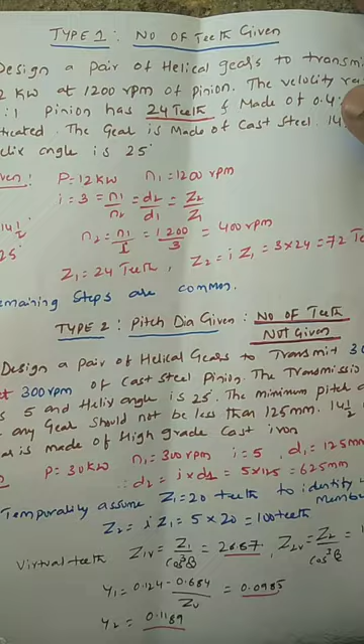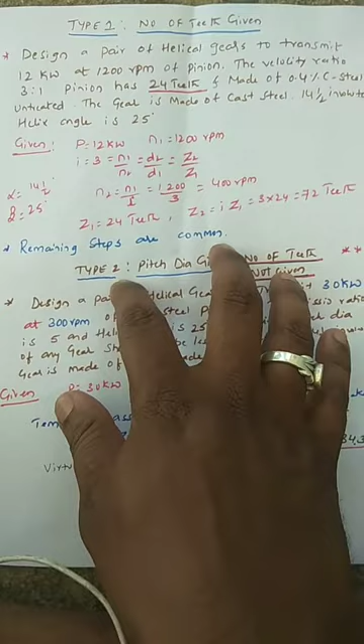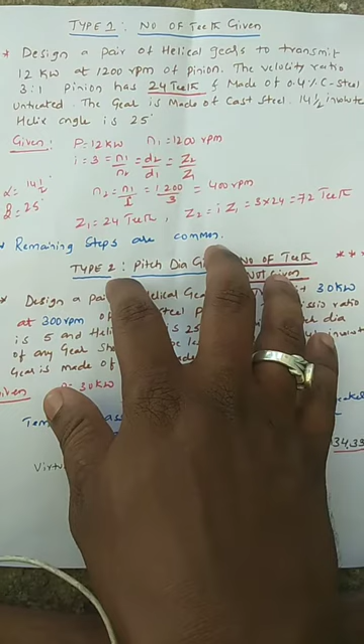Dear students, last class we discussed the helical gear design procedures, and we also solved some problems in spur gear. We found the differences between the design of helical gears and the design of spur gear. Both the steps and procedures are the same for helical and spur gear. The only difference is in some formulas; otherwise, everything else is very common.

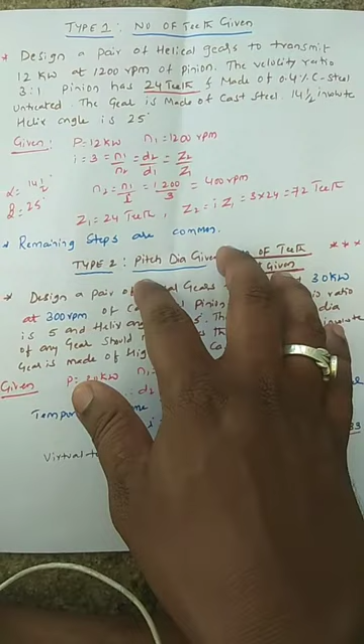So let us discuss how many types of problems there are, and what differences you have to find out between helical and spur gear problems. I'll take the example of helical gears today.

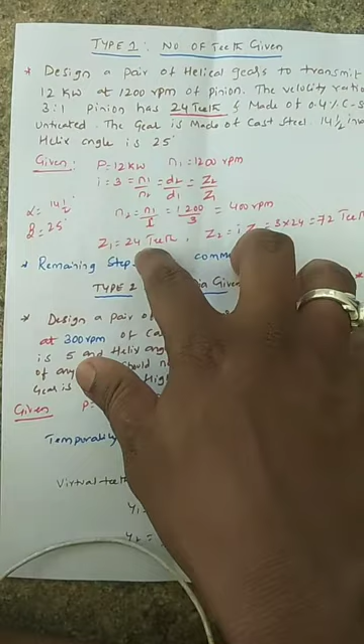The type 1 problem says that here the number of teeth will be given in the question. I repeat, the number of teeth will be given in the question. There is an example like this.

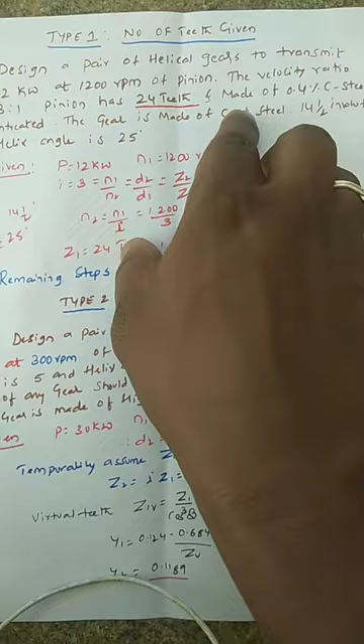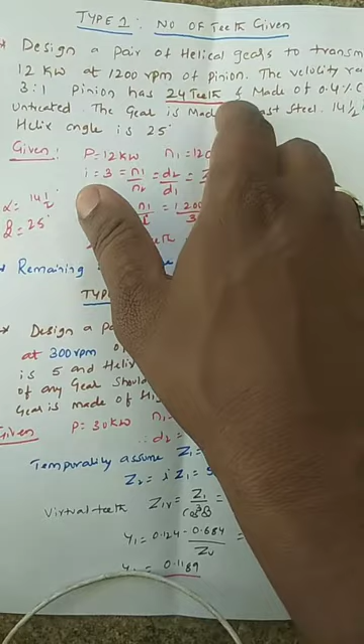Design a pair of helical gears to transmit 12 kilowatts at 1200 rpm of pinion. The velocity ratio is 3 to 1. Pinion has 24 teeth - note this, the number of teeth, z value, is given. Pinion z1 value is given in the question, made up of 0.4% carbon steel, untreated. The gear is made up of cast steel, 14.5 degree involute pressure angle, helix angle is 25 degrees.

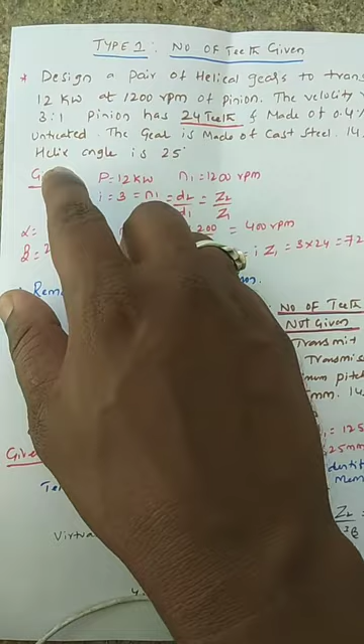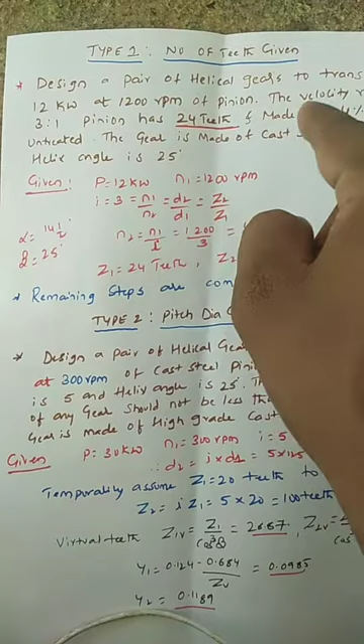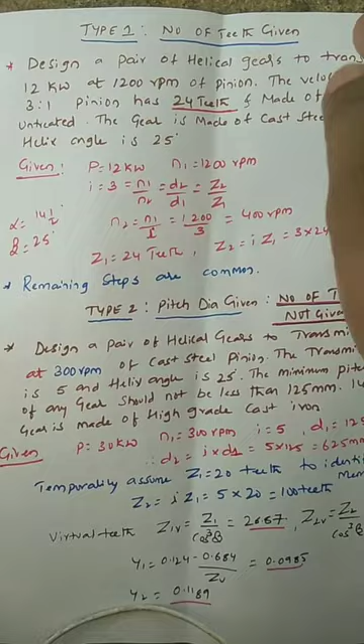In this question you can note the number of teeth, or z1 value, is given. So you can easily find z2, since the velocity ratio value is given, you can easily calculate the remaining procedures commonly - there's no complication. This is a direct type of question, nothing to worry about. If you find this question, follow the same steps and procedures and you can complete it and design the helical gear.

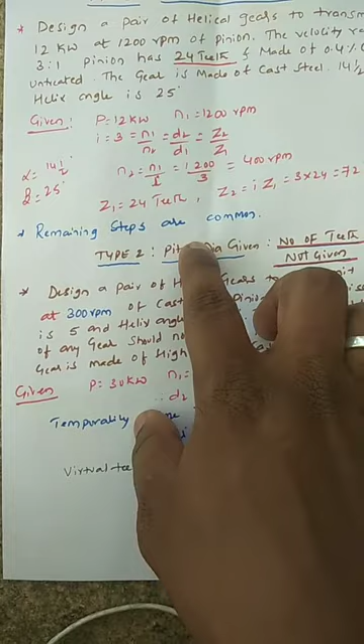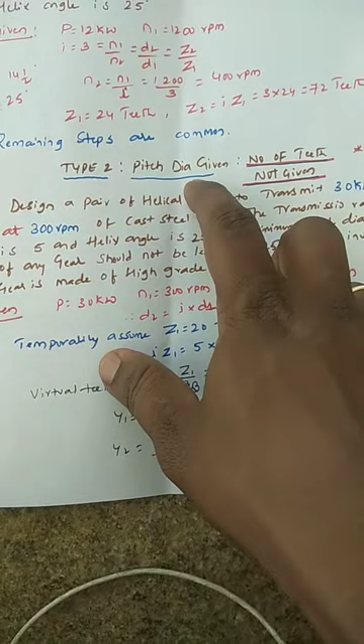Next, type 2 question - this is a very important question. In type 2, the pitch diameter is given, meaning the d value will be given, and the number of teeth is not given. Remember, type 2: pitch diameter is given, d value, number of teeth is not given.

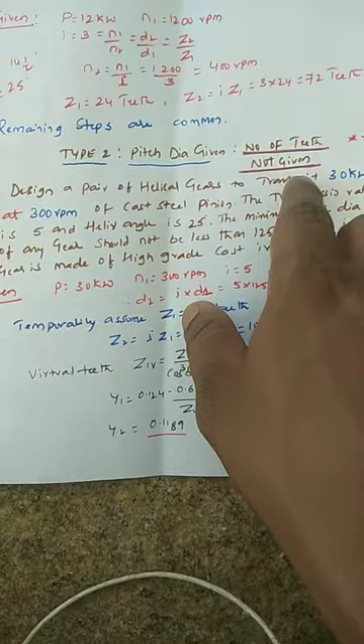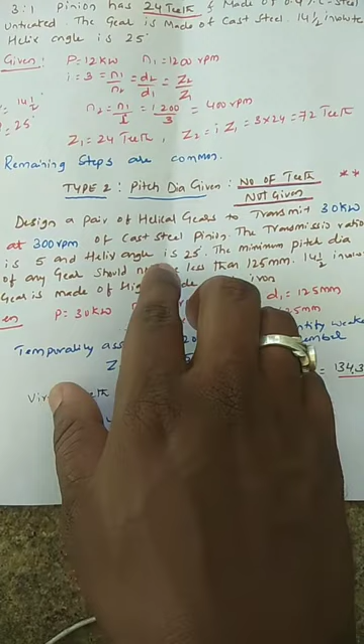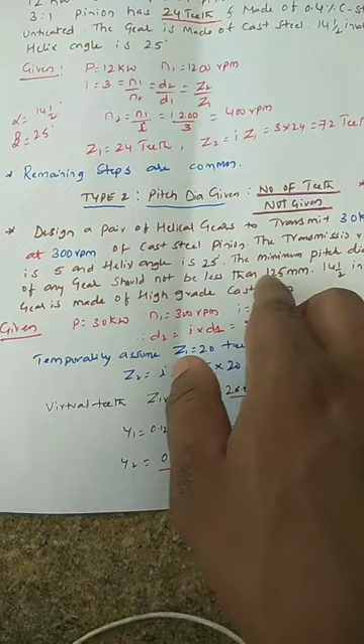Let us see an example. Design a pair of helical gears to transmit 30 kilowatts at 300 rpm of cast steel pinion. The transmission ratio is 5. Helix angle is 25 degrees. Minimum pitch diameter of any gear should not be less than 125 mm - underline this. So d1 value is 125 mm, given, and remaining 14.5 degree involute. The gear is made up of high grade material, as given.

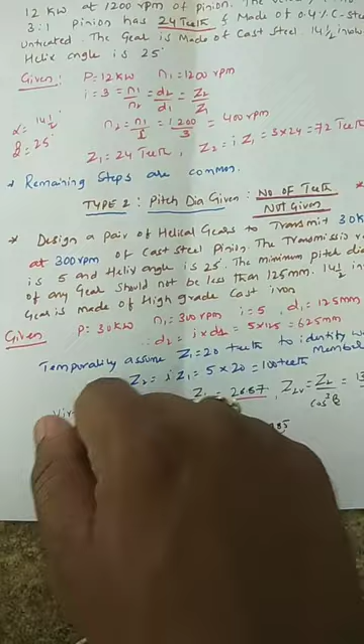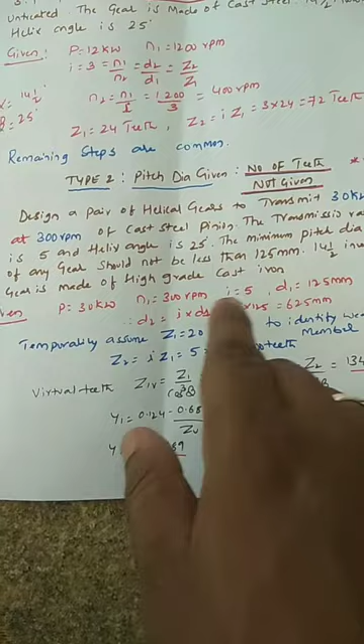In this question, nowhere is the z value, the number of teeth of pinion or gear, given - only the pitch diameter is given. In this case, what you have to find out: first, note down the given things in order and calculate the necessary basic things from these.

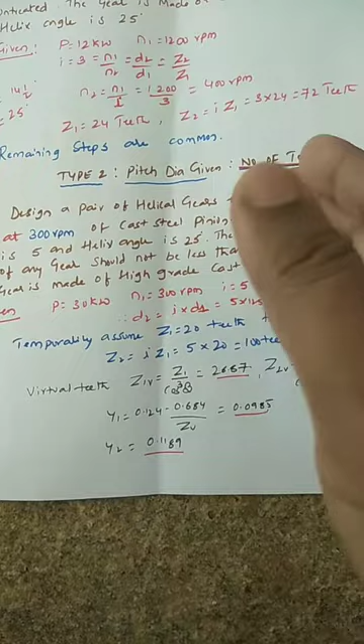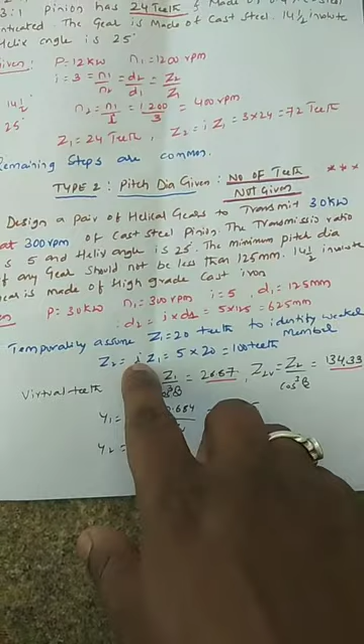The d1 is given, so there is a formula: I is equal to the ratio of diameters. From this you can also find d2, because with d1 known, d2 can automatically be found. The formula is I equals d2 by d1, or d2 equals I into d1 - that you can find out.

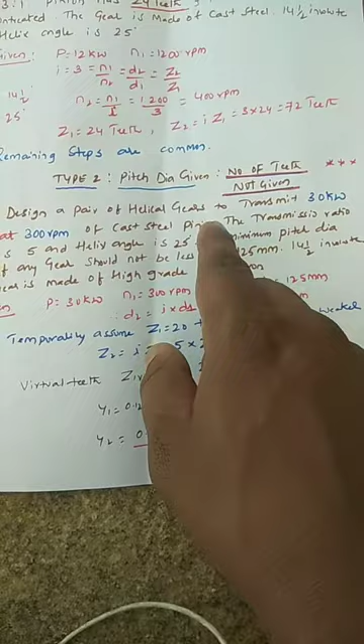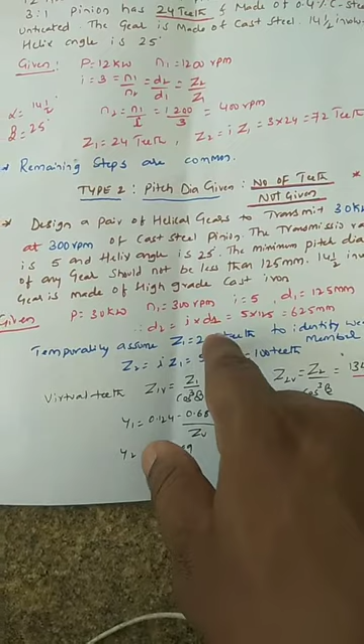Next, if the number of teeth is not given, how do you solve this? You assume temporarily that the z1 value is 20 teeth. You cannot take 21, 22, or something like that, because 20 is also a standard value from the module standard number of teeth table. You can assume z1 is 20 temporarily.

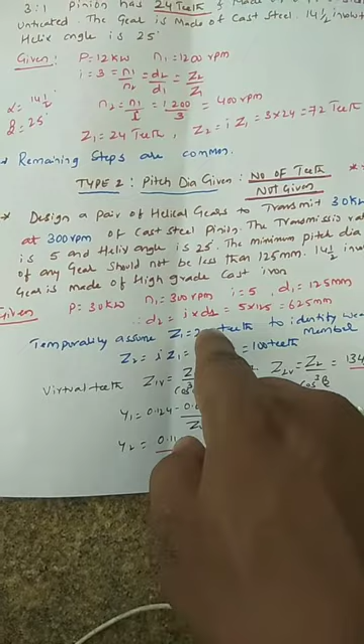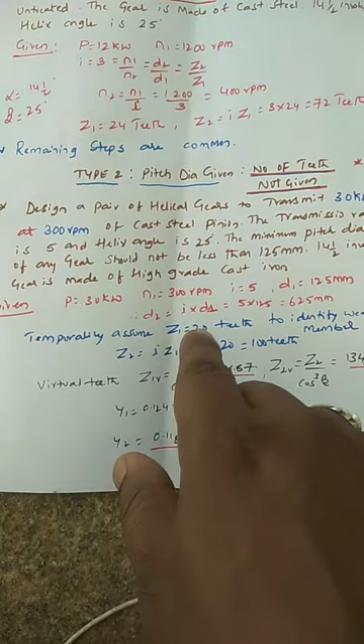Then afterwards, after the first or second step, you need to find the actual number of teeth, the actual z value, in a later stage. For the time being, temporarily assume z1 is equal to 20 teeth to identify the weaker member.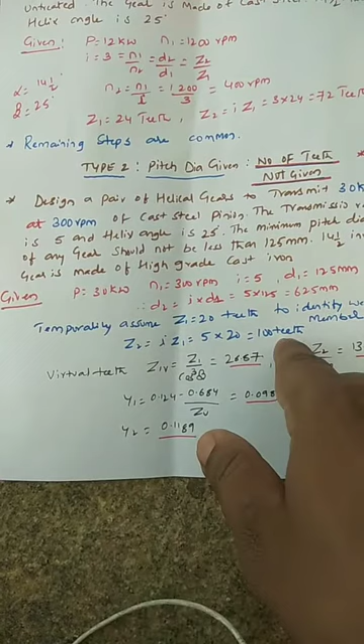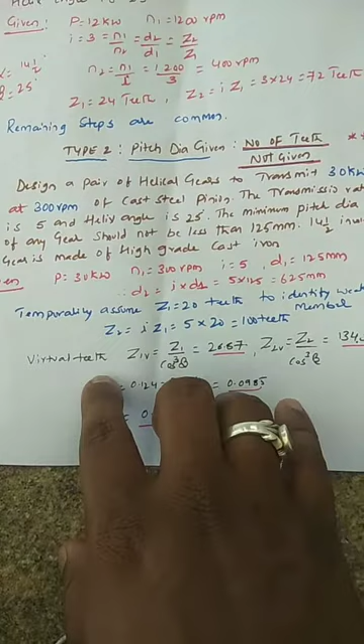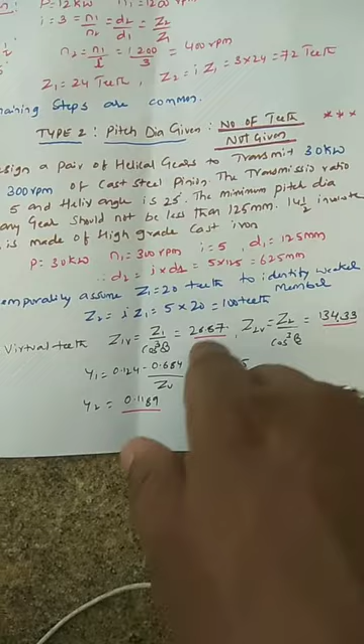So when you assume z1 equals 20, and we know the I value is 5, we can find z2 value using I. You can find the number of teeth of z2 also. Next, one of the important steps in helical gear design is to find the virtual number of teeth, that is zv, z1v - there is a formula for this. Using the assumed values, you find z1v and z2v. Similarly, from the Lewis form factor, you can find y1 value and y2 value.

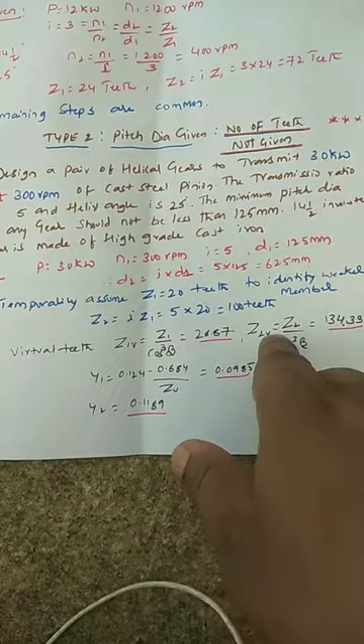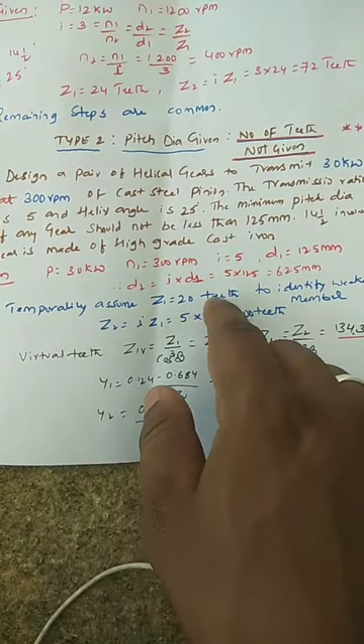Because we know the z1v and z2v values, this will go as per the procedure. Once you assume this number of teeth, remember that at a later stage you need to find out the exact number of teeth - this is only the assumed value. So after certain steps, you need to find the real value of it.

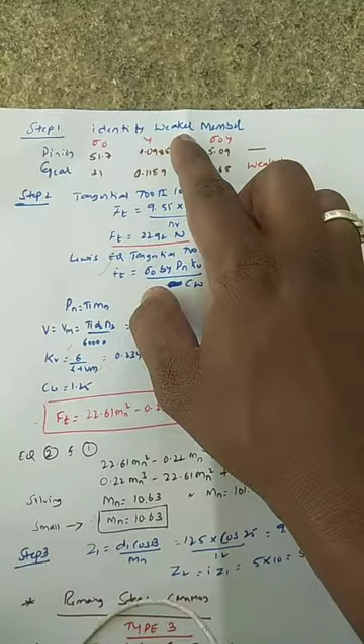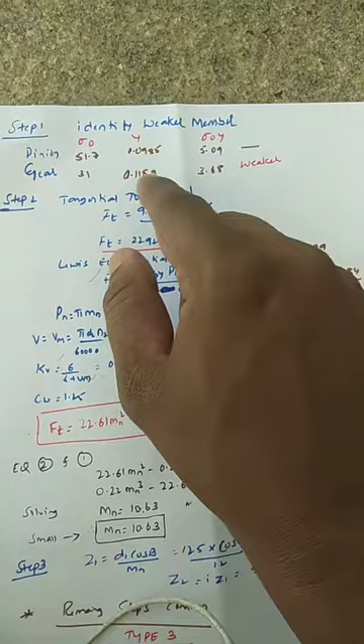Step number 1, as usual, identify the weaker member. Since we know the material part, since we have gear and pinion, and we know the values of y, because the Lewis form factor we already found in the last step. We know this material: gear is cast iron, and the remaining part, pinion, is cast steel. So based on that, we got these values.

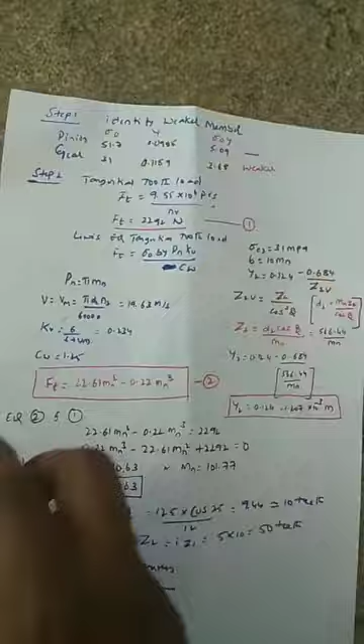We know these y values. When you multiply, you will get it. Since this is a lesser value, we will consider gear as the weaker member, and we will design it based on the gear.

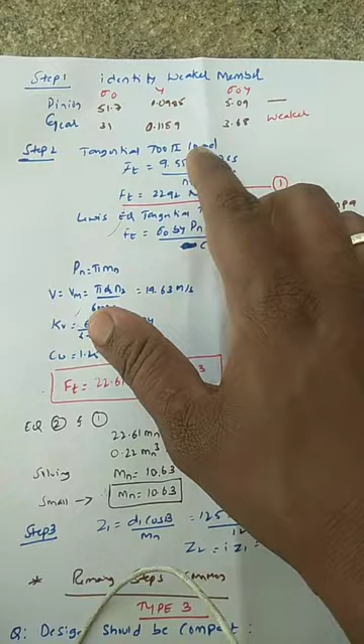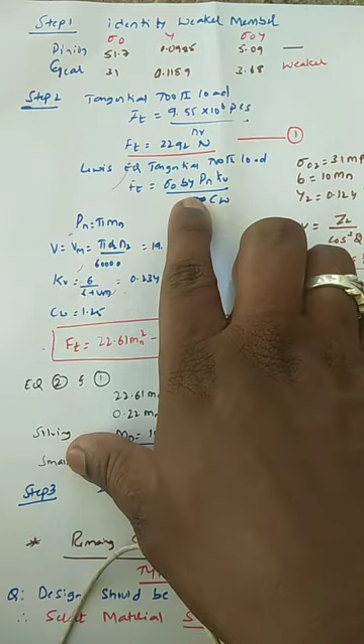Next, as per the next step, tangential tooth load - there is a formula here. You find this, substitute the value, and you will get it. That is called equation 1. Next, one more step, the Lewis equation for tangential tooth load: Ft is equal to sigma b into y into Pn into Kv divided by Cv.

All the things are given. Remember, in this Lewis equation of tangential tooth load, the sigma value will be given because it is already known from the data table. The b value is equal to 10 times Mn, which is also a standard value.

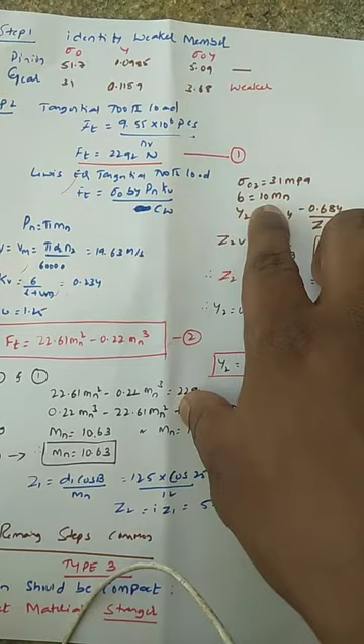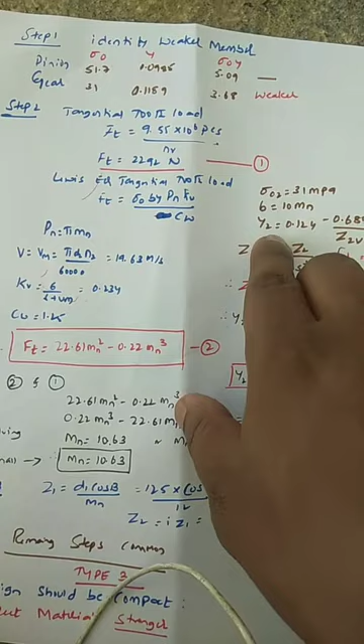Y2 is equal to, since it is gear design, I take the Y2 value. Since pinion is weaker in other cases, I could have taken Y1, but here the weaker member is the gear, so I go for Y2. Y2 is equal to 0.124 minus 0.684 divided by Z2V.

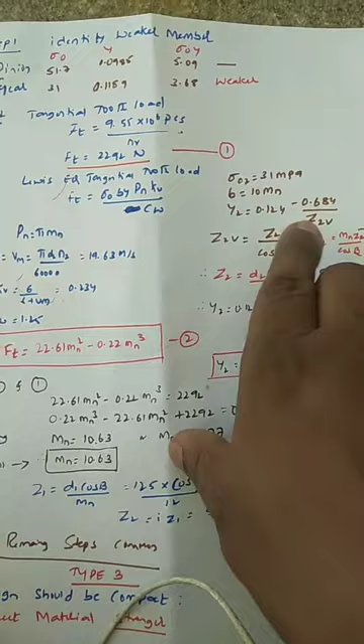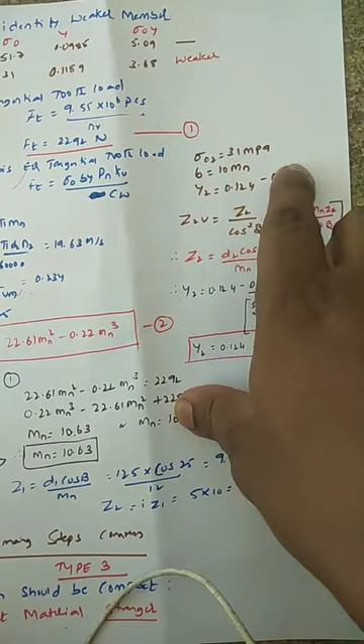Dear students, remember this formula - you can see the Z2 virtual number here. We already assumed the value of number of teeth. This is not the actual value, not the actual number of teeth - only the assumption. Based on the assumption we got it. So we need to remove this z term in the equation.

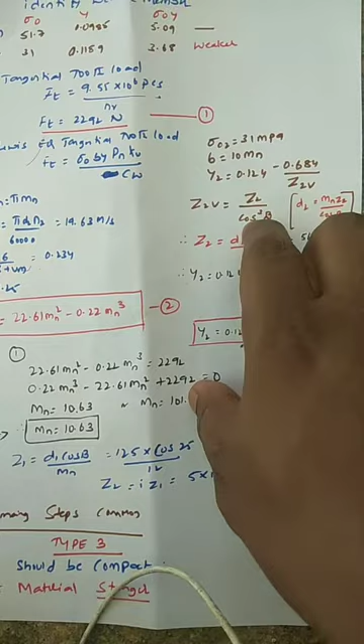So for this there is one formula: wherever there is a z1 or z2 value, Z is equal to d cos beta divided by m. So I replace the z2 value, wherever the virtual number of teeth is there, with another equation in terms of d.

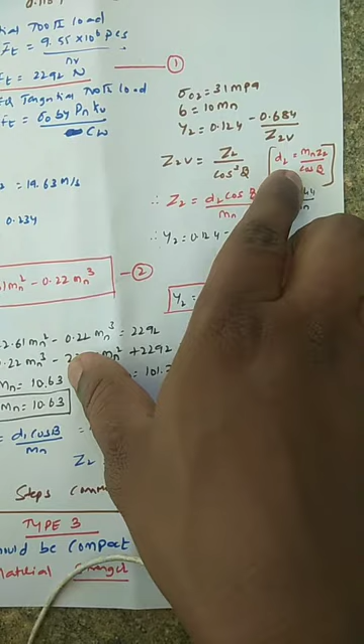Why have I replaced this in terms of d? Because the pitch diameter is given in the question, and the number of teeth is not given in the question, so I should take it in terms of d. So I cross multiplied and replaced wherever I found the z2 value in this question with this formula.

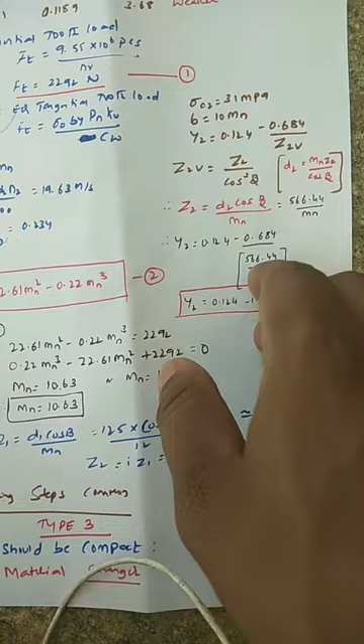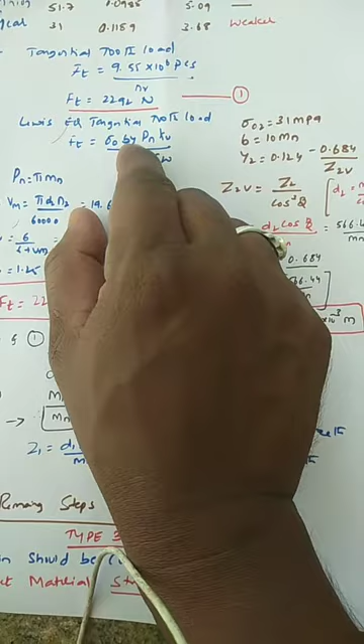So I got some substitution. After substituting and solving this, I get y2 value is equal to 0.124 minus 1.207 into 10 to the power minus 3 into m. This y term I substitute into the Lewis tangential equation. After solving this, I get this equation - equation 1, equation 2.

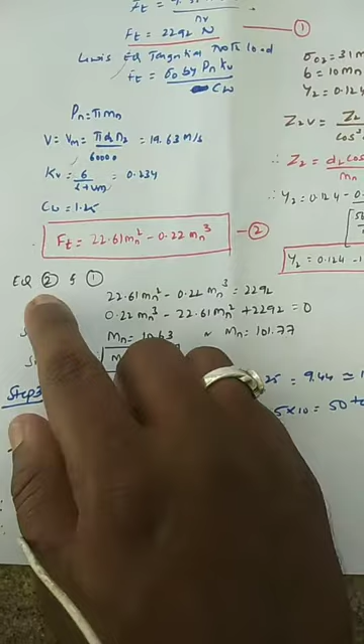So this is as usual a step. When you equate equation 2 and equation 1, we'll get the RHS, and we'll get two values - one is a lesser value, another is a higher value. As per the problem, as discussed in the last stage, we always take the smaller value. We consider this value and stop there.

Next, if you go to step number 3, here we have the formula Z1 is equal to D1 into cos beta divided by Mn. Since the D1 value is given in the question, we know the helix angle beta and the M value here - the standard M value - and if you substitute, you will get the number of teeth.

This is the actual number of teeth. Whatever you got in the previous step was only the assumption value. So in this question, in the Lewis tangential tooth load, wherever there is a y factor, the z term will be replaced with the d term. Then you will get this equation, and after solving this, we find z1 and z2.

Next, the remaining procedures are common, the remaining steps are common, no need to worry about them - there is nothing that changes in the remaining steps. Dimensions you need to find out, and all the remaining things you can calculate as usual. There's one important thing you need to identify - these are the only differences you can find in this.

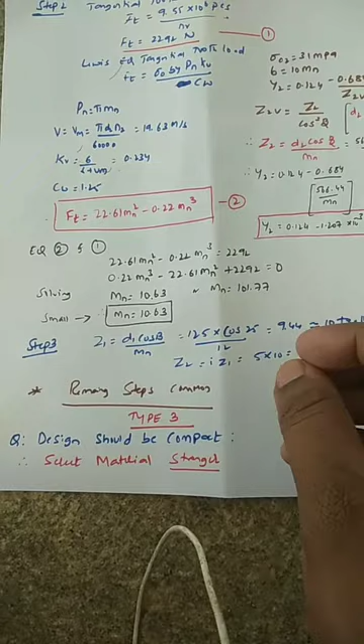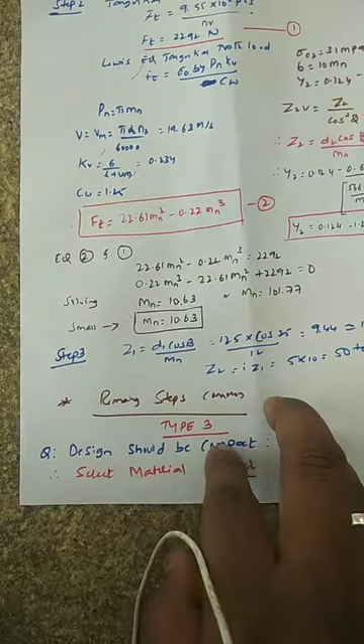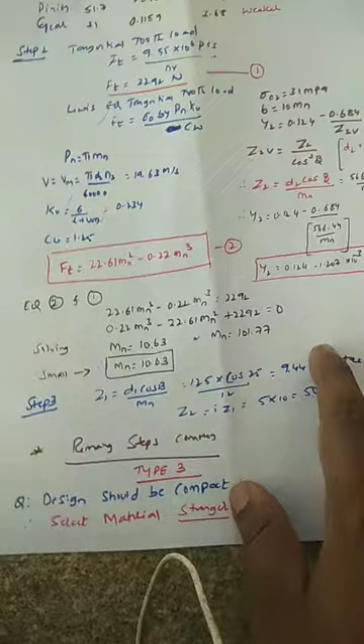If you check the data handbook, whichever value is the stronger material, you have to choose that, because any design should be compact, so you should go for stronger material. This sentence carries importance - this is an important tip in helical gear or spur gear design. Please note this. Okay, thank you.